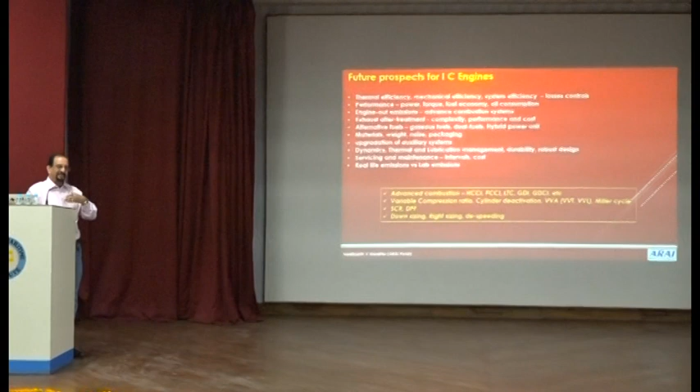We have to go with different advancements in combustion, like we must be hearing about homogeneous combustion, pre-chamber combustion controls, low temperature combustion controls, GDI, gasoline direct injection, gasoline combustion in compression ignition mode, GDCI we call it. These are the new combustion concepts we are working on, everybody is working on, so that we can excel the thermal efficiency, at the same time reduce the emissions coming out of it.

Then various variability we bring into the engine, we can tune the performance as per the given requirement. Variable compression ratio, variable swirl, variable timing, variable actuation, variable lift, all these kinds of variability, Miller cycle, so that we can increase the expansion work at the end of the thermodynamic cycle. They're all employed, but everything comes with a cost.

And all these after treatment systems like SCR and DPF, which is a costly affair, how can we optimize the size and volume and its loading, because we use precious metal in it, how can we optimize its utilization? That work is also going on.

And while doing that, engine should be as small as possible to do the same work, which is called downsizing, that is more power from the same liter of the engine. And at the same time, engine speed reduction. Reduce the engine speed, do the same work, so that lower the engine speed, lower the friction, lower the losses, and we can get good fuel economy. So such challenges are there. I'll not go into detail of this.

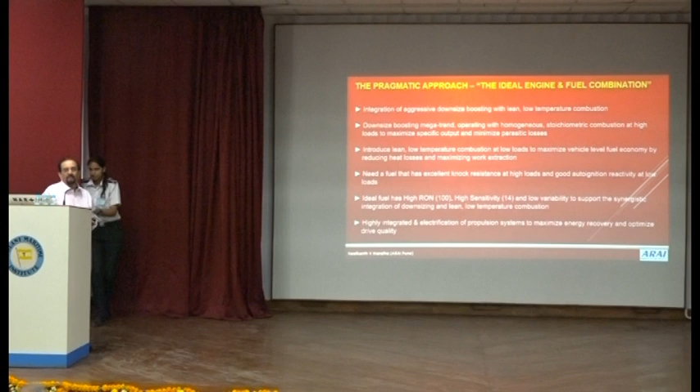Therefore, pragmatic approach is an ideal engine in combination with the ideal fuel through the route of ideal combustion, and achieve the ideal performance out of it.

Finally, when we are talking about hydrogen, our final destination is electrification. All mobility transportation in future finally will be electrified, because that is the only source where we can avoid fuel at all, and when there is no fuel, there is no combustion, and when there is no combustion, no tailpipe emissions. But how to produce the electricity is a big question mark. Again, there are many things, we can speak for several hours on that. But let us assume that it is going to be the final destination.

Now, achieving electrification completely is only possible when you get the electricity from renewable sources. Either it can be wind energy, solar energy, as was given in one of the themes, various energies that are available, but they are going to be a far-fetched situation for us. So one of the things available as a fuel is hydrogen, which can be used directly in combustion as a combustion fuel, but it has got a lot of limitations.

Or hydrogen can be used in the fuel cell, where the hydrogen in the fuel cell can produce electricity, and that electricity is fed via battery to the motor, and then that motor is giving power to the wheel.

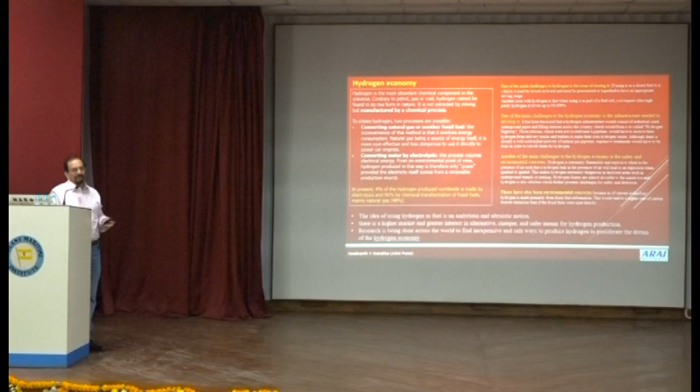and then they give this to battery for storing it, and then run a motor and give power to the wheel. This is the whole scenario that is going to be there in front of us as a visible future, and we have to work in that direction.

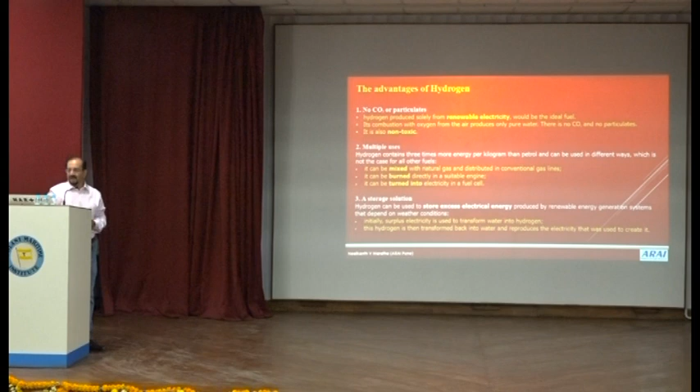The main advantage of hydrogen fuel economy is that since it is hydrogen without carbon, the tailpipe emission is only water vapor. So this is one of the major advantage as far as the hydrogen is concerned. Therefore, everybody is eyeing on it. Hydrogen can be used in the fuel cell directly. It can be of two types of fuel cell.

One is called PEM type of fuel cell, another is called the SOFC type of fuel cell. These are the two fuel cells in front of us as a technology. Everybody is working in that direction. We are also working in that direction. The only difference between two is that PEM type of fuel cell requires 99.99% pure hydrogen, which is very hard to manufacture cost-wise and all that.

And SOFC has got one advantage. It doesn't require that much of pure hydrogen to work it. It can use not only hydrogen but other fuels also directly. Like it can use CO. If we burn methane in air, it produces hydrogen, and it also produces as a byproduct some carbon monoxide. Even carbon monoxide can also be used as a fuel to SOFC based fuel cell.

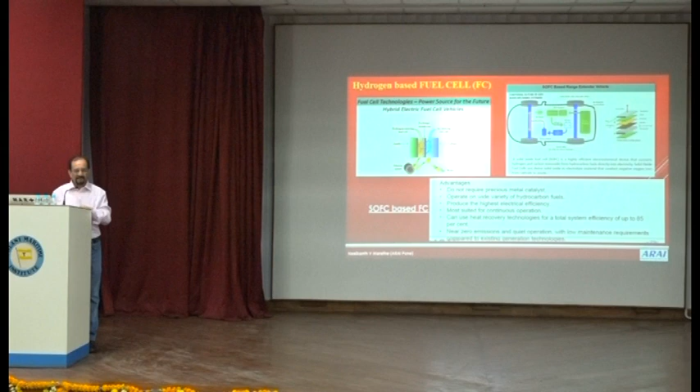So therefore both the fuel cells are having their own merits and demerits, and we are trying to work in both the areas, giving more emphasis on SOFC types of fuel cells for transport applications.

In summary, mild hybrid, full hybrid, plug-in hybrid, electric vehicle, fuel cell cars, vis-a-vis conventional IC engines have got various pros and cons, and for different segments and different applications we have to choose what is right for what, and accordingly that will be the fit powertrain for that sector.

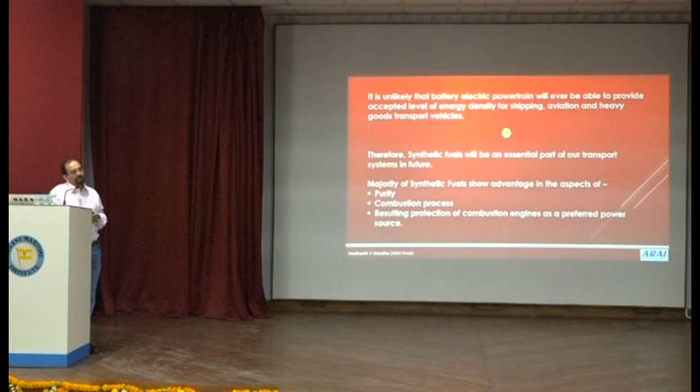While doing that, we know battery electric technology is going to take its own time, and today's IC engines have got a lot of limitations from a tailpipe emissions point of view. Fuel quality is not under control. Therefore, synthetic fuel, as I talked, one of the fuels, DME or other e-fuels, are going to be one of the futuristic fuels for all of us, and we need to work hard in that direction.

From production point of view, from again storage point of view, and all those things. So synthetic fuels, I see a future for all of us.

While working on engines alone is not enough, we have to do a lot of work on transmissions: manual transmission, automated manual transmission, automatic transmission, continuously variable transmission, CVT, dual clutch technology, DCT. These types of new transmission systems are coming up, and they have associated improvement in the efficiency, associated advantage in the transmission ratios, etc.

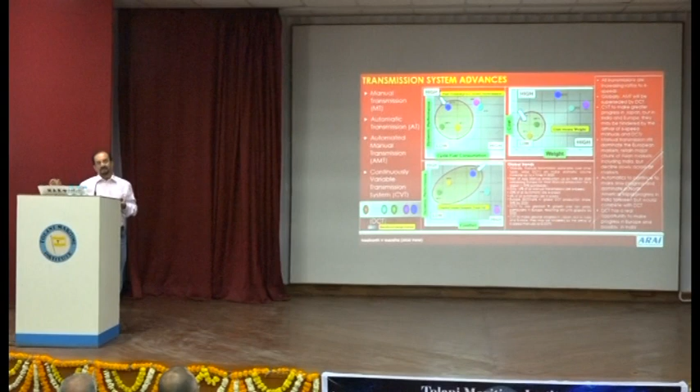So with respect to that, cost, weight, performance, packaging, comfort, luxury of utilization, different transmission systems are coming up. In terms of vehicle design, performance, fuel economy, NVH, safety, reliability, through suspension design, brake design, cabin cooling, aerodynamics, vehicle structure, main structure, tire technology is also becoming very important.

Because tire technology is the only element which connects the vehicle to the earth, and it has rolling resistance issues. Therefore, tire tread design, rolling resistance control, rolling resistance reduction is required to be done, tuned for a given vehicle weight and speed requirement, so that finally the fuel performance of the engine, BSFC performance of the engine can be achieved in the actual vehicle fuel economy targets.

In front of India, the problems that we have are traffic congestion, bad maintenance of the vehicles, fuel quality control. Yes, there is some improvement now, but still there are control issues because of mixing and quality controls. Unsafe road conditions, bad road conditions, poor road signal synchronization. Every 1 minute you have to stop because there is no synchronization of the traffic signal. The more you idle, the more fuel is consumed, the more emissions we emit. There should be synchronization of the traffic signal.

Public transportation has to be improved. I think a lot of work is going on so that private transportation is reduced. Then new technology and old technology vehicles are coexisting in our country. Today, even if you are going to bring BS6 technology vehicles from 1st April, they will be only 15%. The remaining 85% will be old, as old as 15 or 20 years old vehicles.

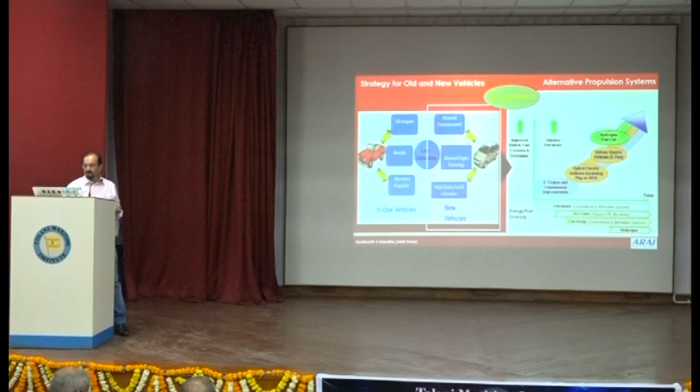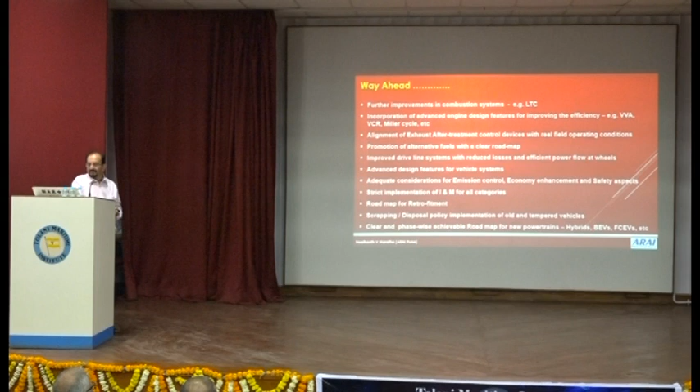So what is the way ahead? A lot of things in front of us. Further improvement in the combustion, new technologies, coexistence of the old and new technology has to be properly handled. Then diesel will not go. That much is sure to us. In the next 30 years, new fuels will come in. We have to work on design features suitable to the new fuels, new transmission systems. This is an important slide from my side.

While a lot of advancement is coming in mobility, not only limited to mobility but in all sectors, the themes that I have seen are in very good alignment with land transportation also: a lot of electrification, autonomous driverless driving, a lot of intelligent transport systems, shared mobility and connected mobility. All these things are going to happen year by year in our country.

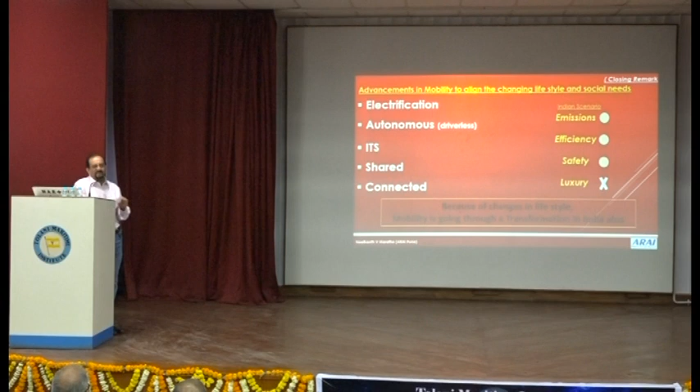But what is important today is any new technology which is directly going to control emissions, improve efficiency, improve safety. Today we don't want luxury as such, but these three things, if we are able to achieve them by any means of advanced technologies, they are welcome, and only then the last item will be the luxury. But unless they are supported by the infrastructure, traffic signals, roads, bridges, flyovers, good road conditions, road markings, road furniture, nothing is going to be finally achieved.

Future technology options, therefore, in front of us are a menu card. When we go to any restaurant, there's a big menu card in front of us. What is good for our health, what we can digest, what is prescribed for several reasons is what we choose. Therefore, not everything that is available in the menu card is going to be liked by us. We have to be very choosy. And while doing that, we have to do a good brainstorm for every sector.

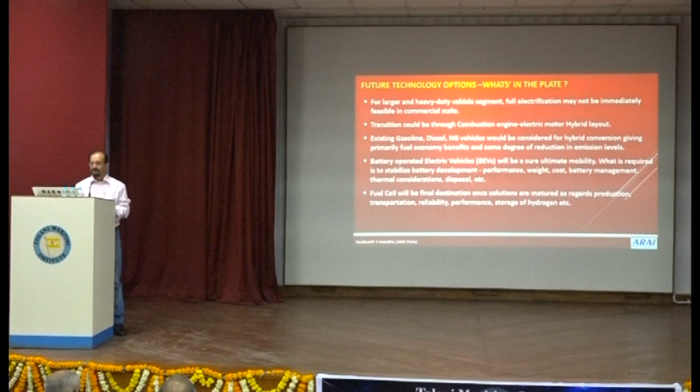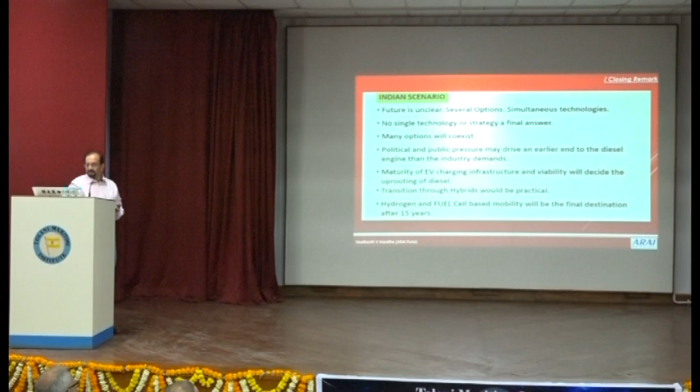So we have to go by choosing the segment and the technology for it. N number of things are available in front of us. Choose the right one. So, too busy a slide. Time is also finishing. So a lot of things are there. I think I will leave it to people to digest. I can only say at the end that for different segments of passenger cars or transportation, a mix of IC engines, electrification and hybridization is available. We have to make sure.

And this is the chart which we prepared in ARAI as a roadmap for India for different segments from two-wheelers to industrial: what combinations of powertrain should be brought up so that focused technology development is done for them with affordable cost and acceptable to the end user from the performance point of view.

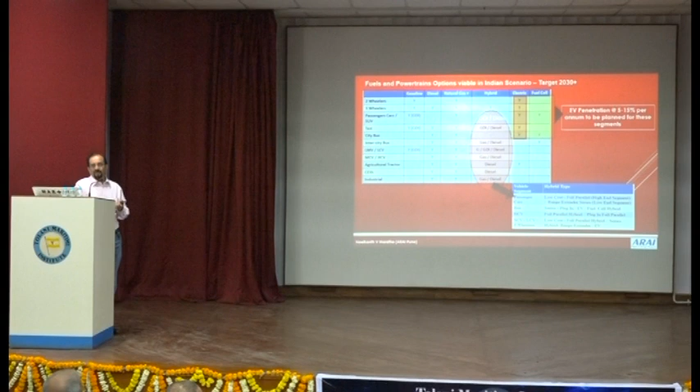Therefore, what do we see? Several technological options are there, several combinations are there. There are many different driving forces which we have to meet and fight with. Several customer perceptions are there, and we have to meet customer perceptions. Unless these are met, we will not be in the market. And several local real field aspects are to be considered, whether political, policy, social or any kind. Therefore, the quote which I will be very happy to share with you: fire can cook our food, we know, but it can burn our body also. That means it is a double-edged sword.

Similarly, any technology has merit, any technology has demerit. We have to choose from its merits and demerits what is right for what, and only then can we say choosing the right solution is our aim, is our task, because the right technology matters. Only then, with the menu card in front of us, can we find the right solutions for future mobility in different sectors by achieving the right powertrain mix.

And I always believe that it cannot be done by any single individual, by any single team, by any single discipline of engineering. We have to work together. Only then can we achieve the final performance, because our great Abdul Kalam ji always said, technology, unlike science, is a group activity, and it is not based on individual intelligence, but on the interaction